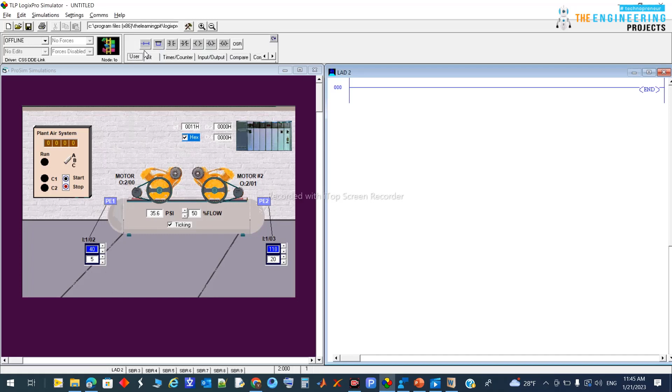Very simple here, we're starting by adding lines like this: the start button, the stop, and the run, and we should latch this one. Naming the contact, this contact will be the start bit. So this is the start, and this is the stop, and this is our compressor. It will be the run, and this run will be latched here.

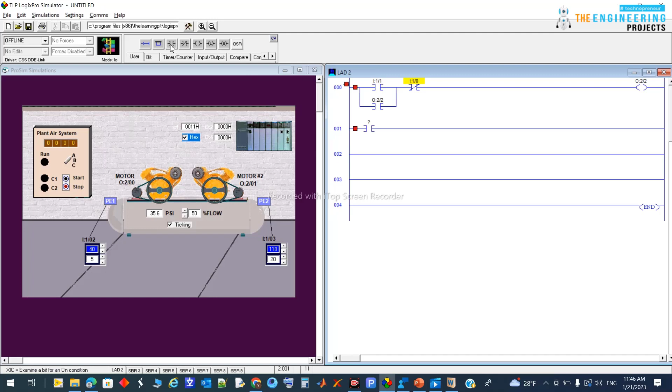Because I need to run one of those, each compressor has a LED or a lamp. So if compressor C1 is on, I need to energize the indicator lamp for it. Same thing here, very simple - I will put this for the other compressor, so if C2 compressor is working, its indicator lamp will be on.

Moving to the next section, now the question is when I will have this run. I'll add the condition for this one to run, and the condition for having it stopped, and this is the one that we have.

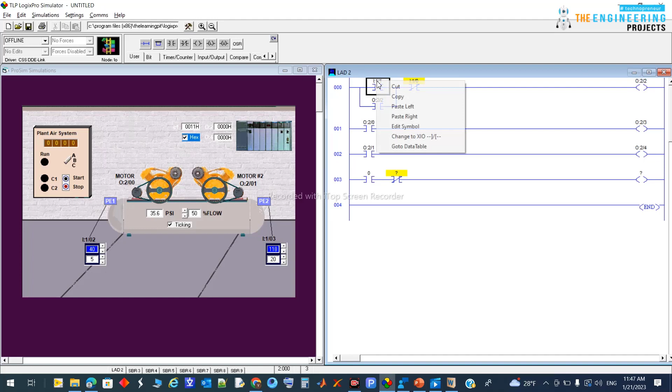So for sure, if we have this run, let's name everything first. Let's correct the spelling. This one is start, stop, and this one is run. This one for sure will be C1 compressor, and this one for sure will be C1 lamp,

and this one for sure will be C2 compressor, and its lamp indicator, C2 lamp. This one will be the triggering for it, this is the first compressor, so I will take this one here, and the other rung for the other compressor. It will have a start for it, like this one. I'll stop it with this, stop with this, and the run bit will be here to activate the process, and this is a run also to activate the process.

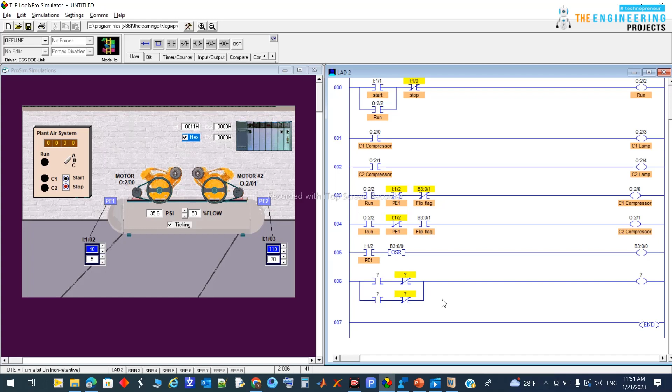So let this be the flag bit that we want to decide, and this flag bit here, and this flag bit in the negative logic here, and this one for sure is when detecting the cycle. Up till this moment, I think we've completed the requirement for having the work on normal duty.

But if we wanted to have the heavy duty, we will detect the heavy duty by this one. So let this one work, for example, from 100 until 80. But that guy will work from 120 to 100, and that guy also works from 100, 20 also.

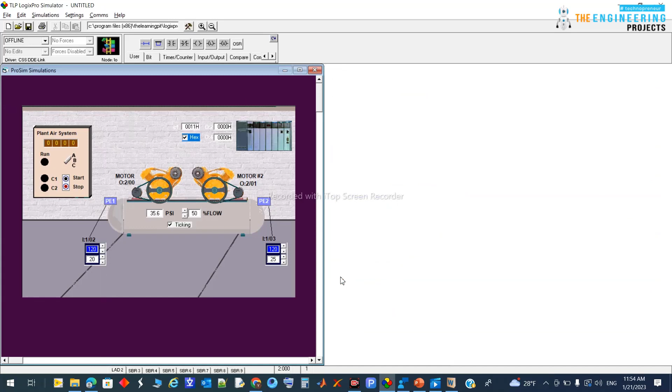So now if I take that guy here, so this rung now, no need for this one, just that guy, I make it here. So this guy I will call the PE2, the other sensor for the pressure, to help me detect the heavy duty.

And this is the heavy duty, we reach B3, so this is B3; 00 and 01 are taken, so this one will be 02. So I will call this one the heavy duty. Okay, so by having this heavy duty here, no need for that guy.

So that guy is the detector for the flip. For not confusing, this is that guy showing new cycle. So by having this new cycle here, we decided the flag to change the operation based on changing the compressor. And here we are detecting the heavy cycle duty.

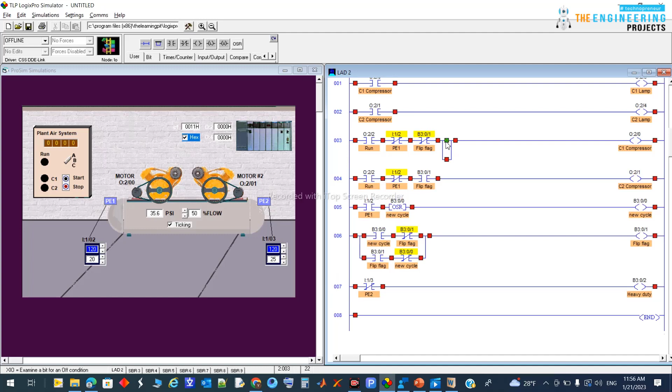So that guy will make this flag change, as you can see. And this is the flag here and there to make this one work. And in the opposite, the next cycle this one will work, so we need just to make a parallel here to let that guy work, and the same for that guy, a parallel one to make it work.

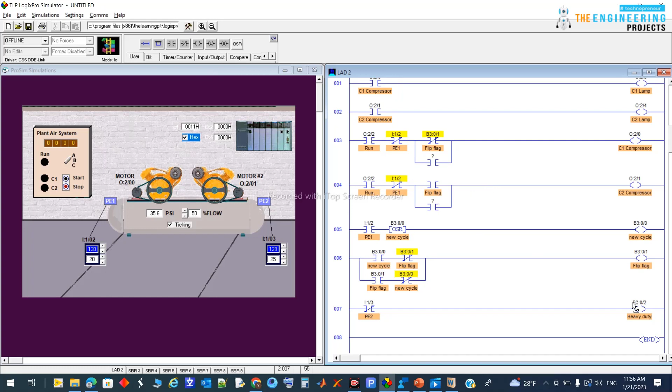So now I will add: if heavy duty, no chance to stop any of them. And same thing here for that guy: if it is a heavy duty, I need both compressors working in heavy duty condition. So I hope it's working, guys. Let's see what's going on and whether everything is okay or we need to change the logic again.

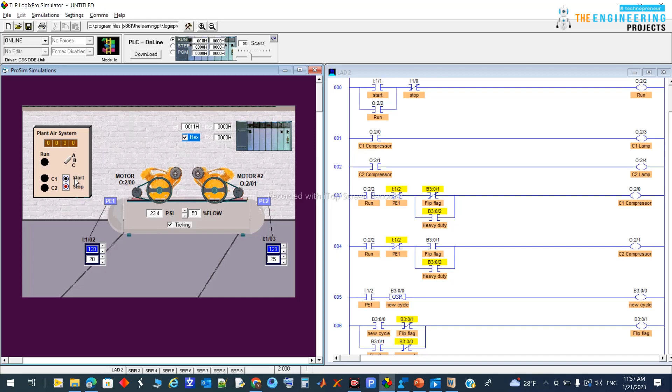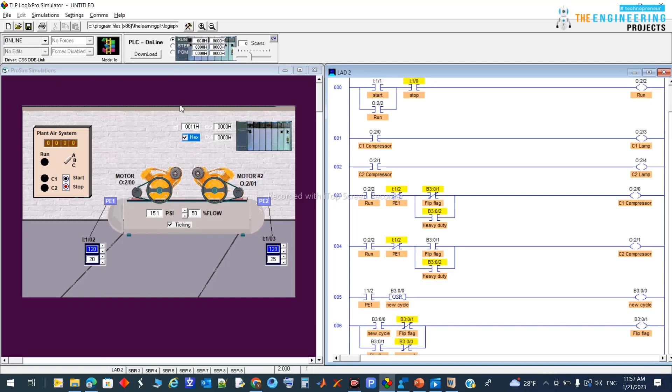So now start. Oh, no start. Why not start? Because we lose the limit. Oh, this is our start, right? Yeah, our start is here. I'm sorry, I think I made a mistake. This is normally closed, so we need it like this. Starting the process again, download, starting the process again by start.

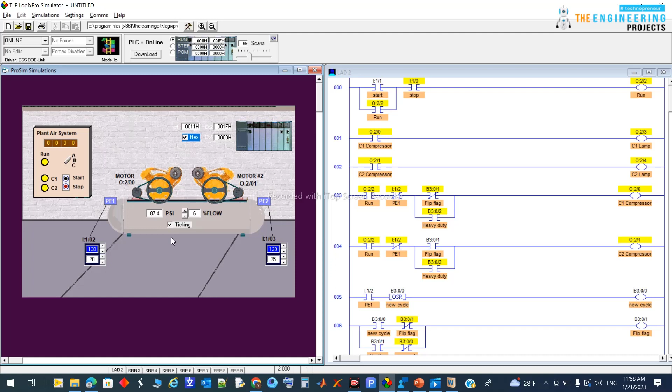So now, as you can see, because we are below the 95, the system detected this is a heavy duty. That's why both of them are working now. And once we reach 120, it will stop. Let's make the acceleration, the flow like this. 80, 81, 2, 3, 4, 5, 6, 90. It continues with both of them, and it should stop at 120.

Yeah, that's it. The cycle stopped, and now people are using the tank, and because we're not under the limit, which is 100, none of them is working. So let's increase the flow and see what happens when we reach 100. That guy or that guy is supposed to work and flip between each other.

7, 6, 5, 4, 3, 2, 1, 100. Here we go. So now we have one compressor working and it will increase until it reaches 120 again. To accelerate the process. When it reaches it again, it will stop.

Guys, I know you're enjoying, but because you're my friends, I need you to stop every time you're watching this video, so you can write the code yourself and test it yourself to make sure you take full usage of this video.

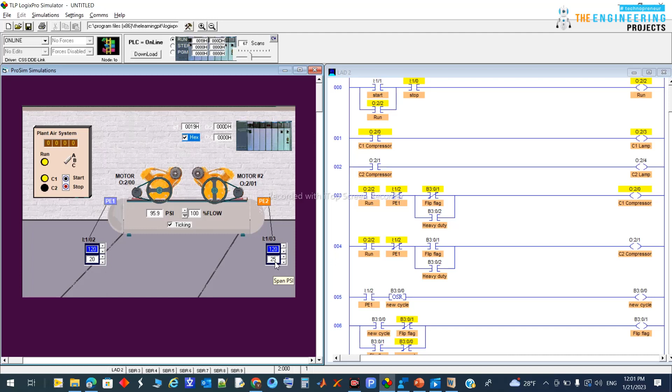Let's increase the flow like this, and you can see that guy goes down. Let's see when it reaches 95 according to the calculation. So the system detects a heavy duty, and now both of them are working together. Amazing, my friends, until reaching 120. At that time, it will stop and the cycle comes back with one of the compressors.

So now, guys, as you can see, we completed our project, and next time we'll go with a totally different project.